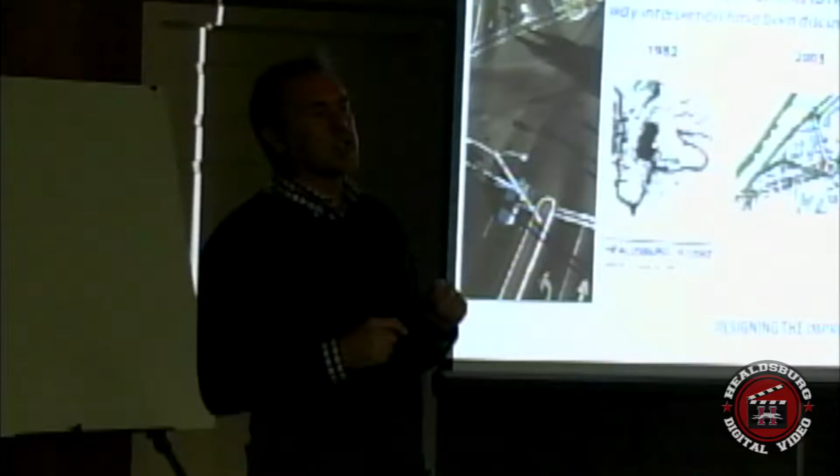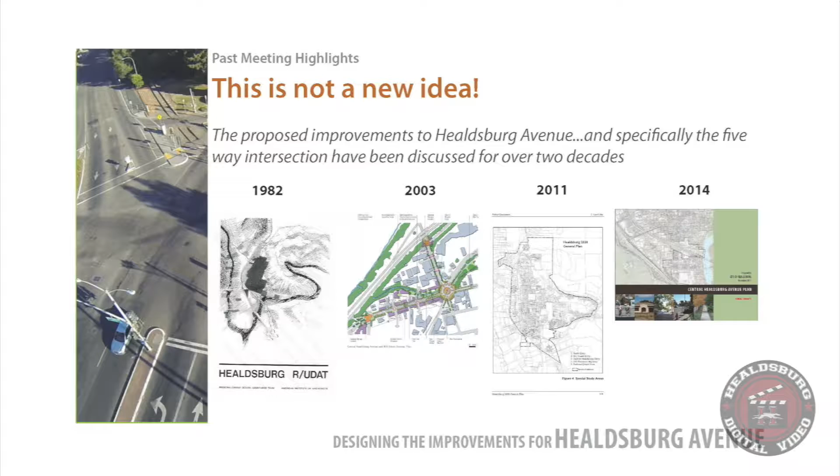So the primary emphasis is that the five-way intersection has a number of pedestrian safety and vehicular safety issues that need to be resolved. There's obviously a train coming through there, and that creates some other safety things that have to be resolved. But there's also, with the approval of the Central Healdsburg Avenue plan, the potential long-term relocation of Nu Forest, development will be coming.

So this is all about improving how utilities and traffic and pedestrians will function within this corridor, not to mention the quality of the experience when you drive into town. Second thing is, this is not a single project. I know there were some comments made at some of the other meetings, boy, this is a lot of money for a roundabout. This is much more than the roundabout. The roundabout is resolving the five-way intersection.

There are actually 5 components to this. The major component, or one of the big components, is actually improving Healdsburg Avenue from Exchange Street all the way up to the five-way. What it looks like dealing with improving pedestrian movement, sidewalks, etc.

Reconstruction of the Foss Creek culvert, which you don't really see, but there's some serious water flow and structural issues in that culvert, and that needs to be rebuilt. There's an upgrading of and repair and expansion of utilities to accommodate future development within that zone. So really, the city is investing in that area in order to allow development to begin to occur in an area that they've targeted as a priority development area.

And then the last one that everybody seems very excited about is just putting all of the overhead lines in that area underground. Cable, phone, power, and actually getting it underground so that corridor is much more appealing visually, as well as it will improve some of the capacity of it. So that was for the first meeting.

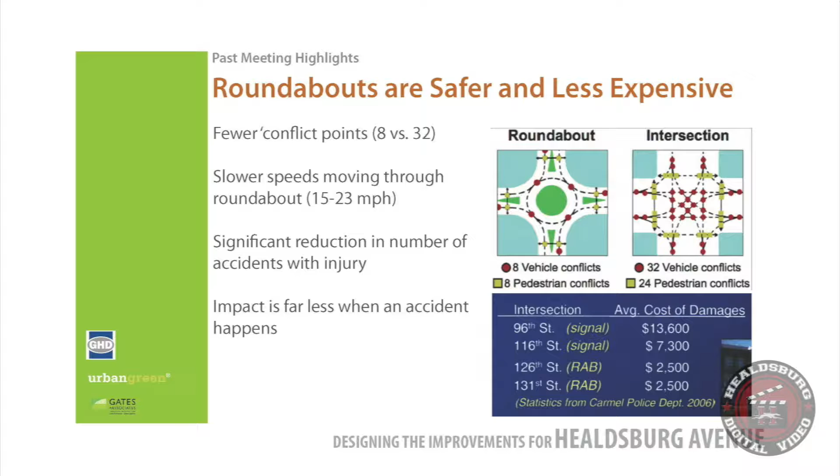This is a chart that Carmel put together showing that in a four-way intersection, the average accident causes about $10,000 worth of damage to somebody's car. In a roundabout, it's about $2,500. So there's a much lower level of expense and impact because of the way they're designed and the speed at which people are driving.

The other thing a lot of people have asked about is how pedestrians and bicycles get through a roundabout, because it does seem a little counterintuitive. It's not just crossing at the crosswalk.

First of all, the sight lines in a roundabout are directed at the pedestrians, so you're not looking out to your left or right peripherally, you're looking dead on at them. So there's actually better safety for the pedestrian.

The pedestrian is only crossing one lane at a time. You can see in this image, there's one lane, they go to the center island, and then they go to the next lane. So they're only crossing one at a time, which gives much better safety.

Pedestrians have priority. Cars actually have to yield to the pedestrians.

Cyclists, as they come into this—and one of the things we'll be working through in the design is where the cyclists go—actually have the opportunity to just go into the flow of traffic. Because of the fewer conflict points I talked about earlier, it actually works better for bicyclists, and the fact that people are driving slower makes it easier for them to react quicker and also to yield to pedestrians.

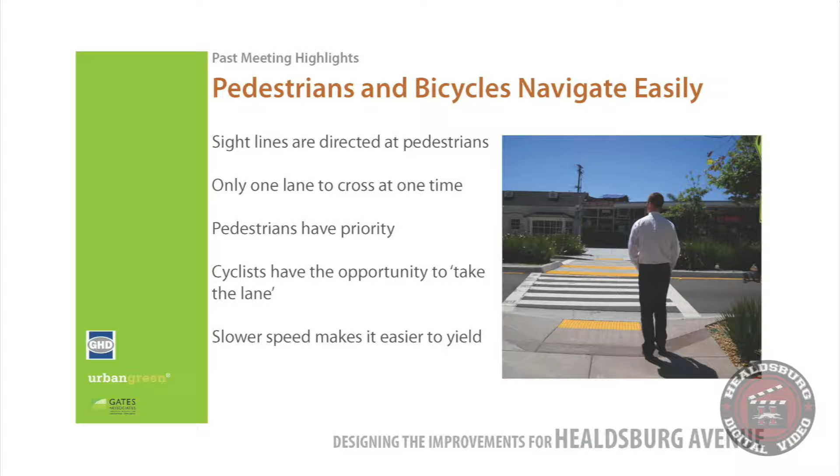The other question a lot of people have had is, can roundabouts, especially a single lane roundabout, handle big trucks?

Roundabouts are designed to accommodate all vehicles, big and small. There is a narrow lane that provides a visual traffic calming effect for people as they're driving in, because the pavement looks narrower.

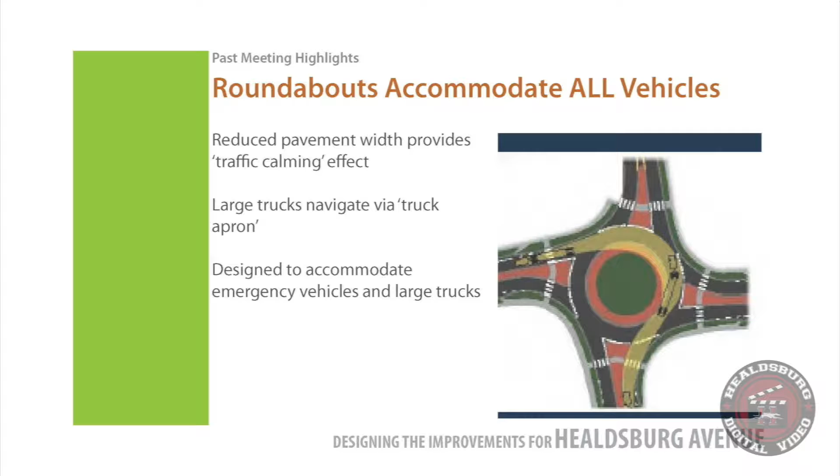But there's this so-called truck apron, the red zone you see in the center, that trucks can actually drive up on. So there's plenty of room for trucks to maneuver, be it a fire truck, a truck hauling construction equipment, or a truck hauling grapes. They'll be able to get around this—it's all designed to accommodate that.

Okay, so that's kind of the last two hours of community meetings in five minutes.

I want to jump quickly to the Central Healdsburg Avenue Plan, because, as I said, that's a keystone document for the work that is underway now.

First of all, the CHAP, as we've called it, is a vision plan, not a specific plan. So what that means is it sets out policies, guidelines, and some framework issues—it doesn't define in detail what goes where. The idea is it provides a vision for that area.

This is the area basically from the five-way intersection down to Exchange Street, out to 101, not quite to Front Street—kind of a midpoint in there—but it's really a lot of those industrial lands that are likely to change over time, given what's happening in Healdsburg and the proximity to the freeway.

It was really meant to set the vision for that area before development comes—before a developer shows up with an idea. This was the community coming together; it was a very active community process that set together a vision of what they wanted to happen.

So there's vision, principles—it really is based on a street type framework. What is the character of the streets in that area that defines not land use, but the pedestrian and vehicular experience in those areas? And then it provides some design guidance for how the buildings around that inform it.

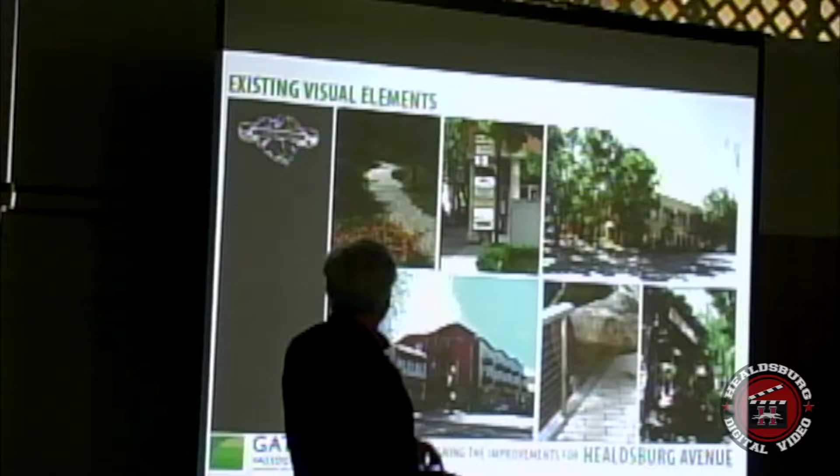Next image. So these are just pieces, whether it's a native plant garden along the edge of the creek, or that's a bench, I think, at Shed, which is kind of fun. So you've got a real range of things - that's that big log that broke through. You've got new architecture, you've got old architecture, you've got a lot of trees.

Next image. So looking more at the street we're dealing with, we're going to be connecting to something that's already there. There's already been talk about the more formal part - this is the more casual part that we're going to be building. So this is what we're going to connect to, this is what you have now.

Signage - you've got Shed on the lower right, very unique architecture. It's kind of fun, but very different from a lot of historic architecture. You've got a lot of things going on. We need to cut through those things, take them apart, and put them back together on our piece of street.

Next image. So let's talk about what we're dealing with. We've got a river, we've got a beautiful community, we've got a town plaza. We're fortunate that 101 did not slice this town in half like so many Caltrans corridors did.

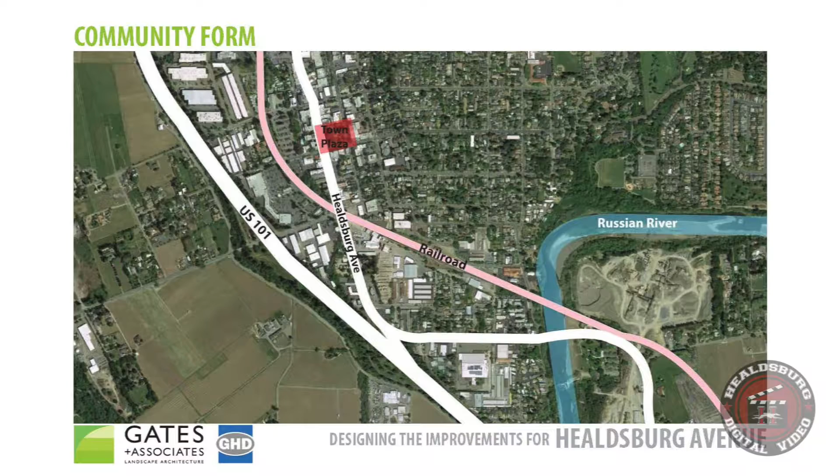It left it very much intact. You've got a railroad cutting right through downtown, of all things. Of course, that's kind of what makes it special. And then, of course, the river and all the agriculture that goes with it.

Next image. So this is what we're dealing with tonight. It's a piece of street. It has a Foss Creek corridor going through it. It has a rail line slicing through it. As you come off the freeway, you've got a first impression—you arrive at a gas station and a McDonald's parking lot.

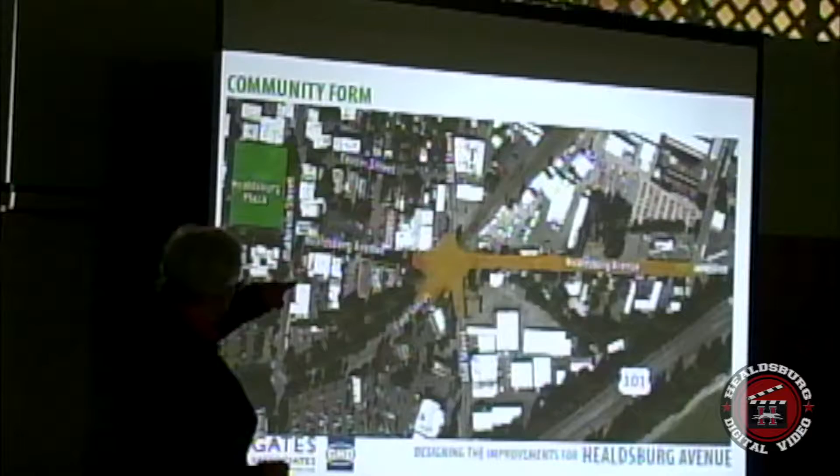You know, we can change that. It's basically 4 lanes of road through that entire strip coming into what will become the roundabout, which will be here, and very little parking on that. It's rather wide—there's a shared lane in the middle that you can make turns off of. It's a lot of asphalt, probably not nearly as scenic as the upper part.

Next image. So what we're trying to do is break this into bite-sized, digestible pieces. You don't have to listen to this, but when we give you a base map to make your collage on, it'll have this information on it, but I'm going to walk you through it.

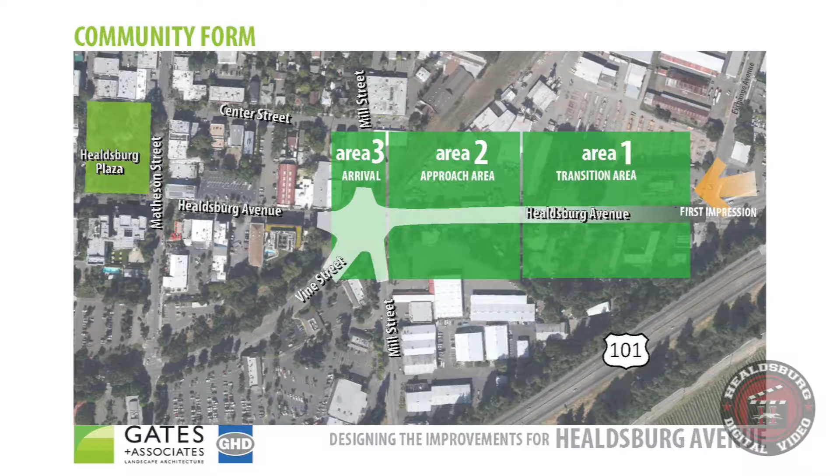So you know how we're perceiving it. So in dealing with the street, we think something special should happen here. At that point, you're out of Caltrans' way, you're coming into this place—it's what we're calling the first impression. Here's the McDonald's with the parking lot, and then you're pretty familiar with the other facilities.

This is what Jim was talking about. This is going to change. We need to create this vision so when the private sector comes in and has a great idea, it's going to be in sync with the vision that this community has.

So we have Area 1, and we're calling that transition. The diagram we're working with tonight has Area 1 basically as 4 lanes of traffic with some median shared, and it's going to transition from 4 to 2. When the right-of-way goes to 2 lanes, that allows for more medians, more planting area, and some parking on the side—so it's a different feel, a different travel pattern.

And then Area 3, we're coming to something, and that'll be the roundabout. It's going to be highly visible—a very important thing that you've come to, that really sets the tone for this community probably more than anything else we've got. It precedes the plaza, and as Jim mentioned, we don't want to cannibalize the magic that is the square, the retail center—we want to build into it.

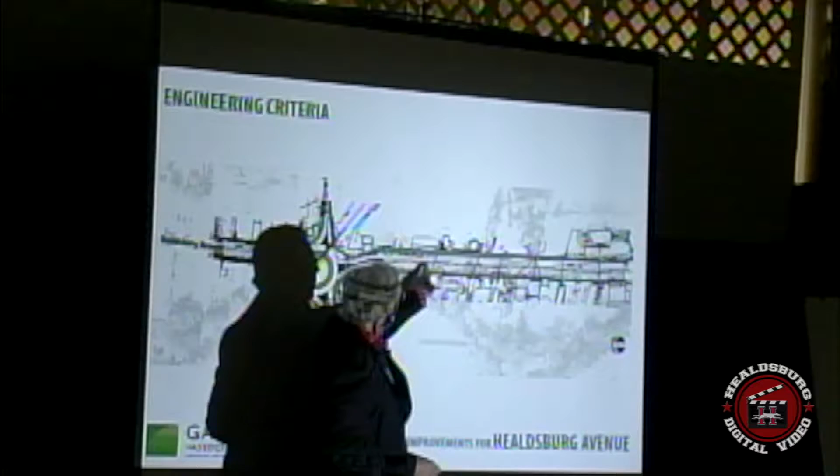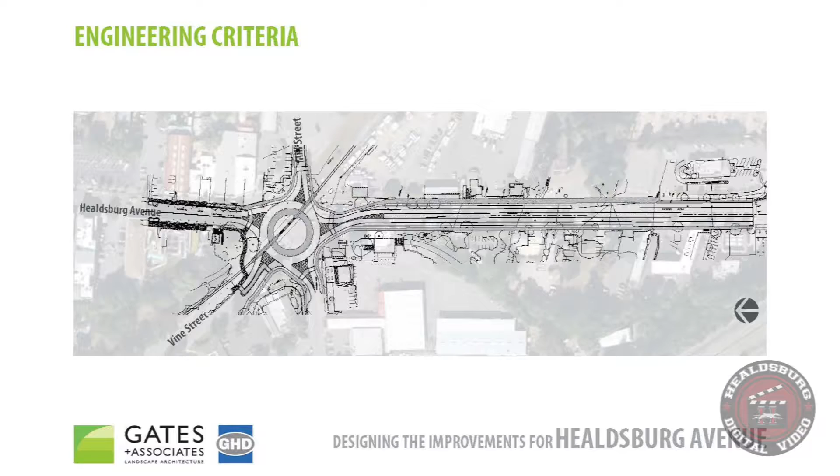Here you see it—this is the roundabout, this is the rail line. You're seeing a new center travel lane, you're seeing sidewalks, you're seeing the 4 lanes there transitioning to 2. You're seeing the pieces, and I'm going to explain—we're going to treat these diagrams as something we're designing with and around. Those are going to inform the imagery we can create.

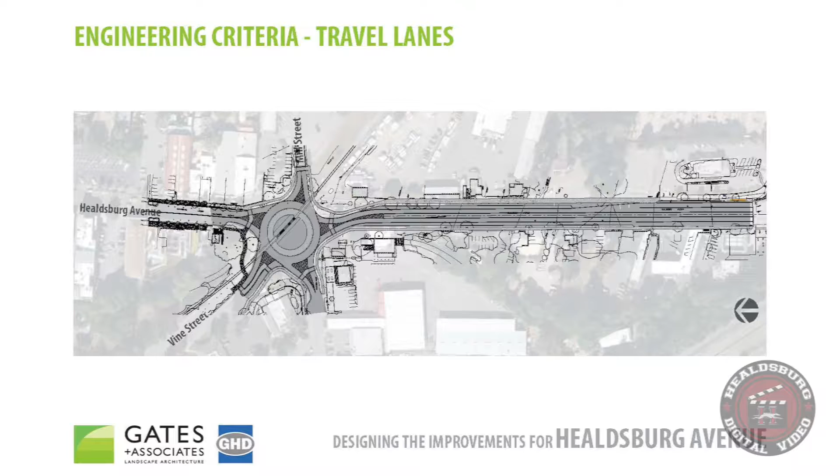So the next image, I'm just going to fly in pieces of it. So these are the travel lanes—it's a little hard to see, but basically 2-lane, 2-lane, middle zone, narrowing into 2 lanes. So 4 to 2, then you're seeing median areas where there's actually no car at all.

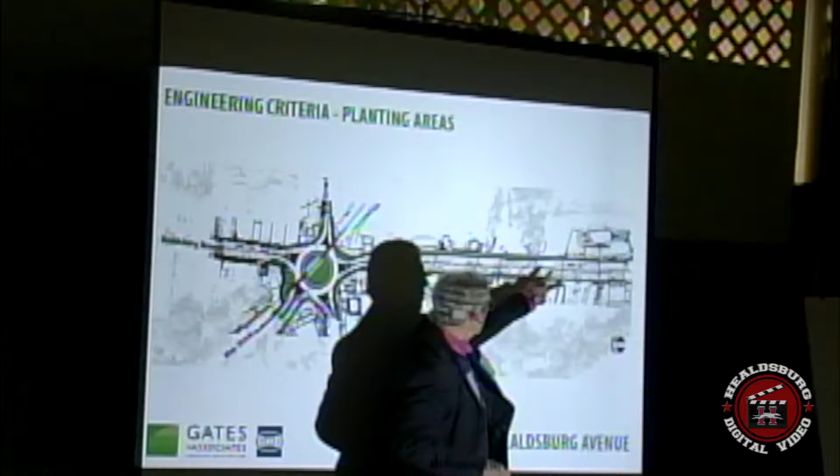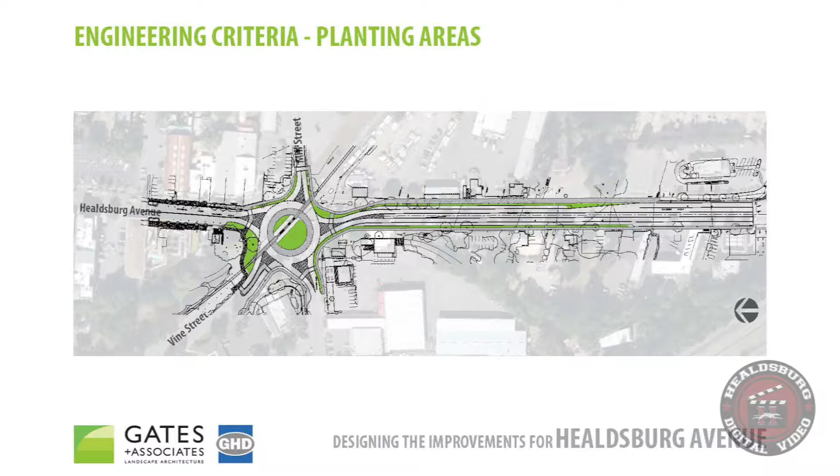Next image. These are the planting areas. So when you create a new curb, we've got a 5-foot strip on either side for street trees and other things, and there's some very generous areas. You can see where we're transitioning from 4 to 2—we get some nice pockets, some very nice corners. The old curb line was way back here. So we're seeing a lot of opportunity to bring in character, green, and other things in those zones. Next one—this is the crosswalks.

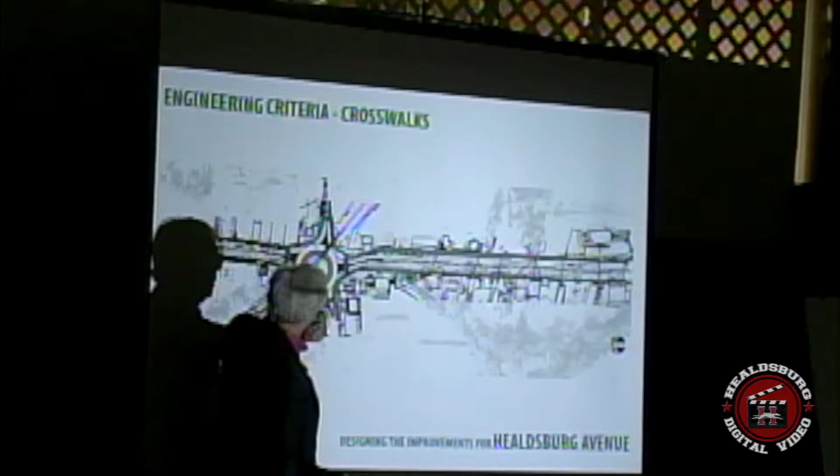A little hard to see, but you're seeing we're going to be getting across the street in these areas, crossing here, crossing there. It's very, very intricate to work with pedestrian and bicycles relative to the roundabout.

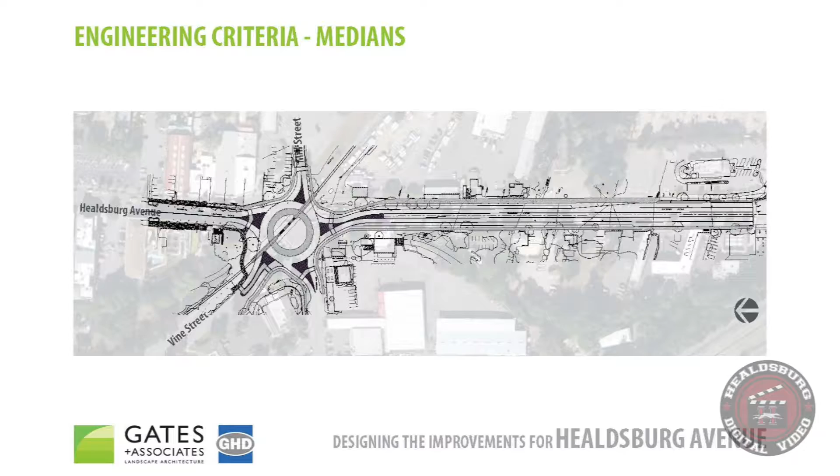Next image. The median itself, these are the dark areas. This whole zone right here, not sure why the color's not jumping on that, but that's a turn lane, and the medians are the green areas we saw before.

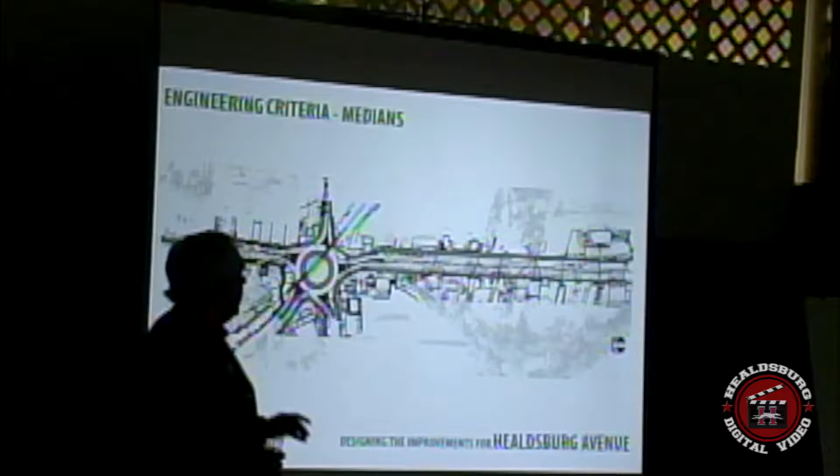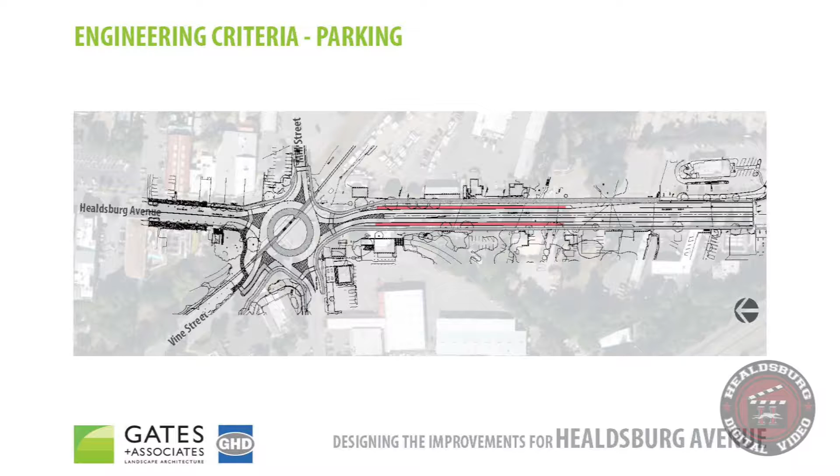Next image, I think, will show you those are the parking areas. So that strip, that's zone number 2, remember, has those places to park along the street.

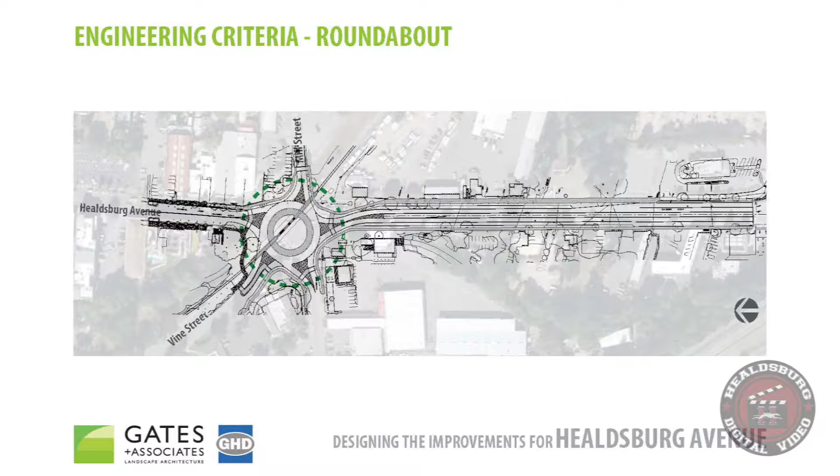Next image. The roundabout itself, which we'll see a little bit more in a minute. It's big, it's got a lot of reality to it.

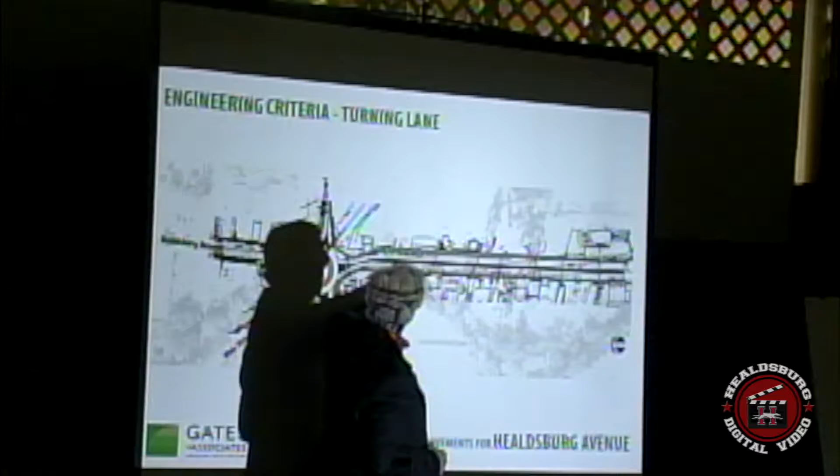Next one. The turning lane, which is this mid-zone, the 2 travel lanes on either side. It allows you to get in the middle and make turns in either direction. It doesn't have to be all turning lane. There might be some greenery in there in certain places. We'll find out, but that's a key part.

Then the walkways, you're seeing sidewalks on 2 sides, a 12-footer on the east, an 8-foot wide sidewalk on the west, the lower side. Next image.

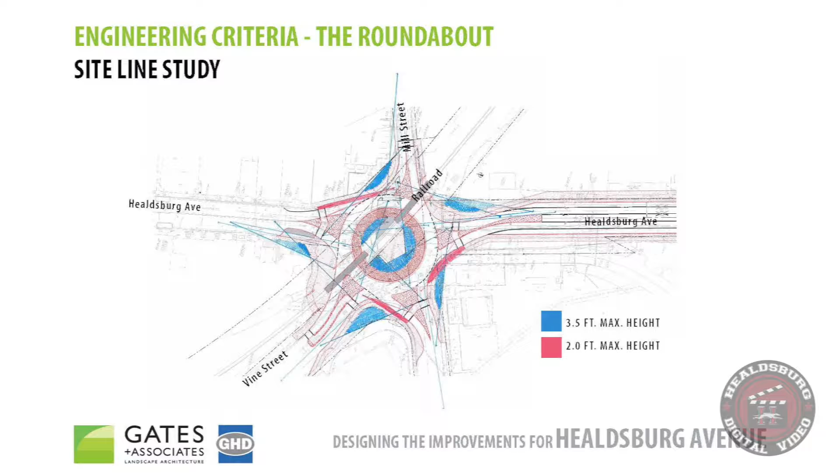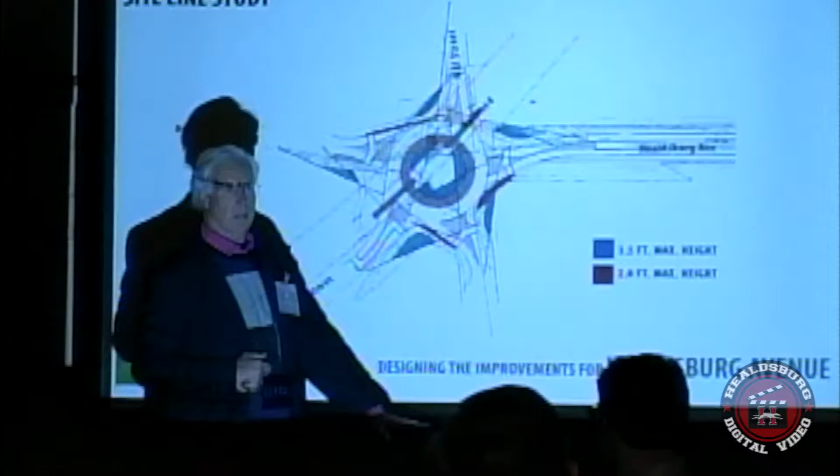This is a roundabout. I won't get into too much detail, but for our point of view, anything in red has to be lower than 2 feet high, and we're thinking sculptural elements, low walls, signage, and other elements. And then anything in the blue, 3.5 feet.

So you can see a lot of site realities, a lot of character that's set by the safety factor of seeing a train, seeing a pedestrian, seeing cars as it moves around. And Jim went into nice detail on all the benefits of that. This is the diagram we have to work with.

Next image. So now what we're going to do is try to take the street, and we have a list on the wall, and it'll be part of your workbook. But basically, we're going to take a street and break it into a series of zones: a drivable zone, a plantable zone, a walkable zone. And within those zones, you've got signage, light fixtures, columns, awnings, bollards, you name it, fruit stands.

And so on the side walls here, we're not going to expect you to memorize all that. So we've got the list there, and we've got the instructions, and it'll be all part of what you need. But I'm going to walk you through some of the pieces just so you know how we expect you to use this workbook. We're going to show you images and explain what the zone is.

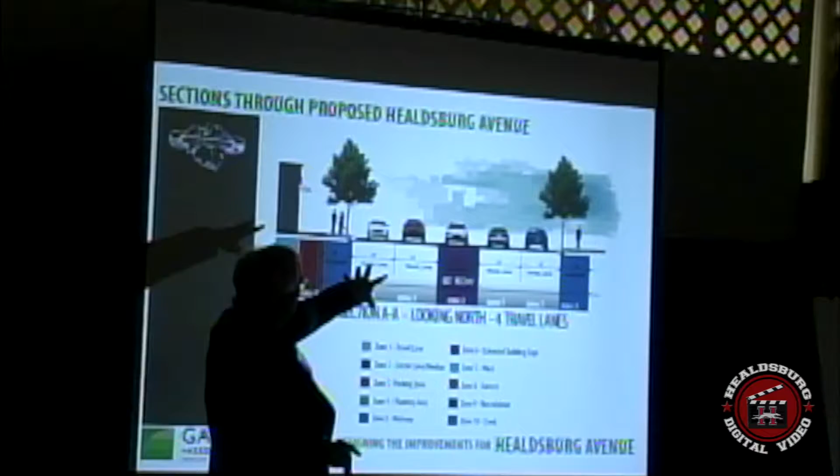So next image. So what we've done, this is a cross section. This is down to the south end where you have 4 travel lanes. So all those things I just talked about show up.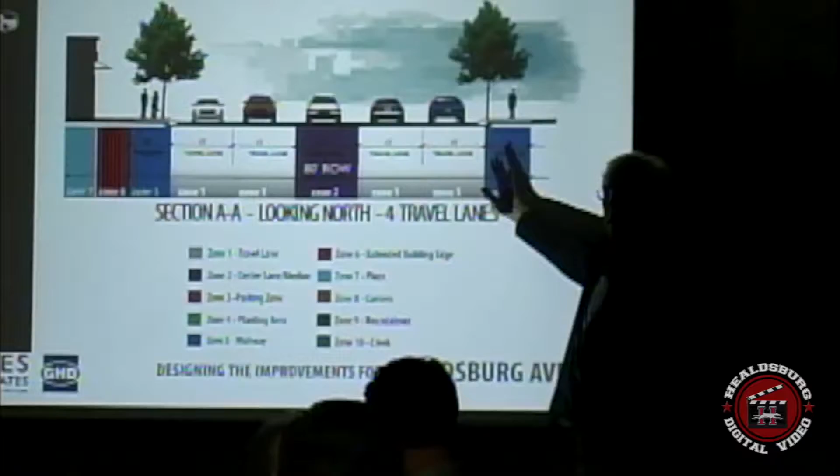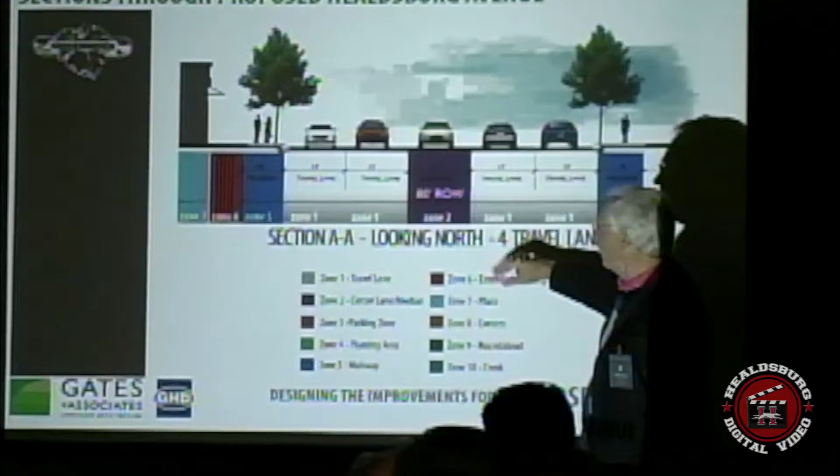So this is the walkable zone, so-called sidewalk. No parking, so you go right to a travel lane, then you've got that middle zone, that transition zone, 12 feet. It's going to be mostly striped. It's a turn lane, travel lane, 12-foot walkway.

Zone 6, and all these are color-coded, so I'm going quickly. Zone 6 is what we're calling an extended architectural edge. So it's going to be building entries. It might be little setbacks. It might be column lines. It might be an arcade. It might be an awning.

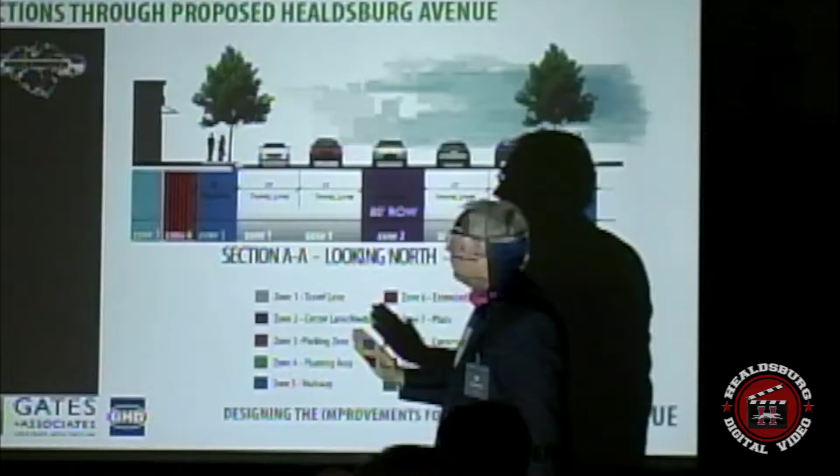So we've given a series of vertical lines. The building could sit out here with the door sitting here. So it's kind of a flex zone where the architecture meets the sidewalk.

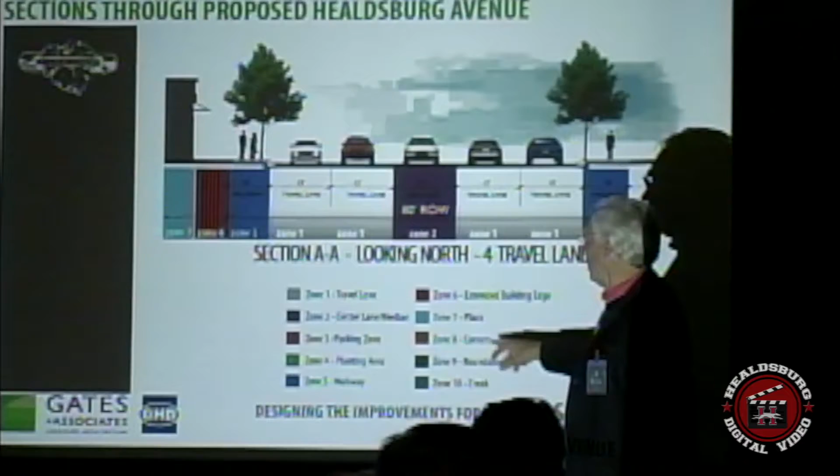And then on this zone, we've got another, which these are all keyed here, which is what we're calling a plaza zone. So somewhere that architecture might recede 20 feet, and you might have a little outdoor eating area or a plaza. And you might also have a paseo, where you make a right turn and you walk. And remember those 5 criteria? Discovery, routes, and sort of having fun with nooks and crannies. That's where those will happen.

So there's one more section now, because this is that first zone transition. This is the next zone. And so you're seeing now we've got architecture on 2 sides. We have 2 travel lanes.

So all of a sudden, we got a lot more fun here with landscape architecture. We've got our building setback zone. So we've got the plaza zone. We've got the corner. Keep in mind, at these corners, we can do exciting things.

So we've got the corner zone. We've got that building edge zone, which flexes. We've got a nice sidewalk, a nice plantable zone. Now we've got some parking on the street, so we have a separation between the parking. Single travel lane, that same 12-foot median and turn lane. Another travel lane, more parking. Another green strip, 5 feet. Another 8-foot sidewalk on the east side. And then we've got that architectural setback zone.

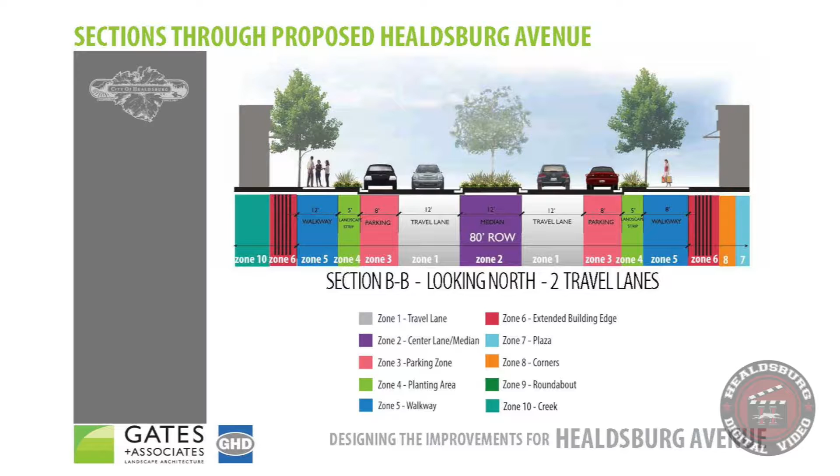And in this particular one, we have the creek zone, because the creek will show up on the west side. And that was a high criteria, was to take the creek, try to bring it back best we can, and make it a usable, visible, important part of the community.

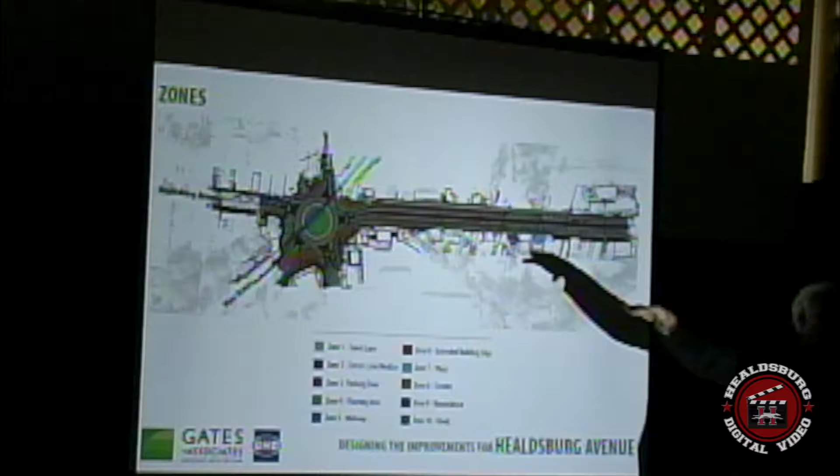So the next image, I'm just going to give you some character sketches. Here they all are together. This is the base map you're going to have. You're going to have a 5-foot long drawing, and it's going to have this on top of it. And we're going to ask you to create cutouts and images that show us what you think happens in these areas, sort of a free form. So what do you want to do with this plantable area? What do you want to do with the possible building edge over in that area? That we're going to let you tell us.

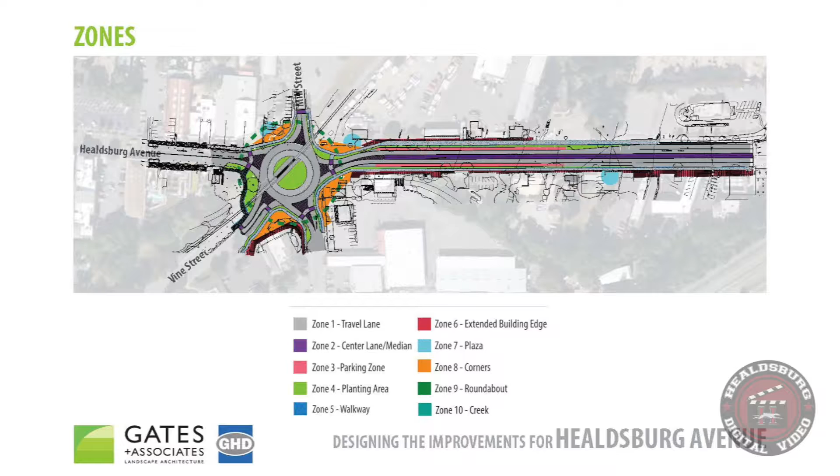So next image then, I'm going to go through each zone and just give you travel lanes. Pretty obvious, right? You know, we might be able to do something with the asphalt. Maybe there's a chip seal or something, but travel lanes tend to be travel lanes.

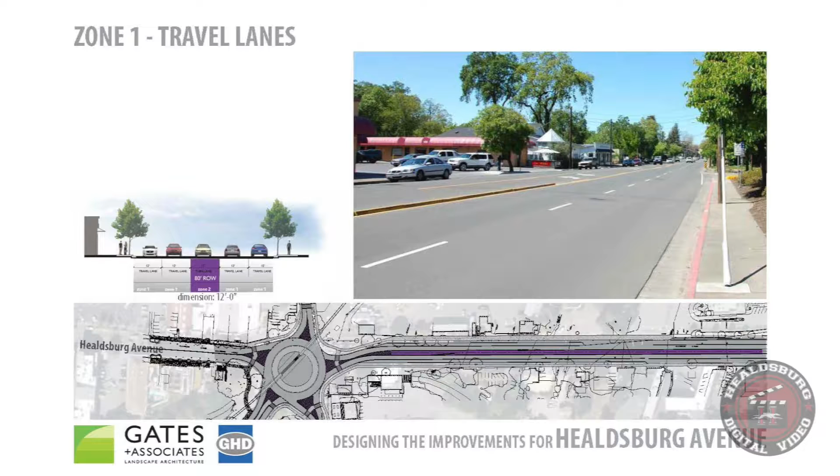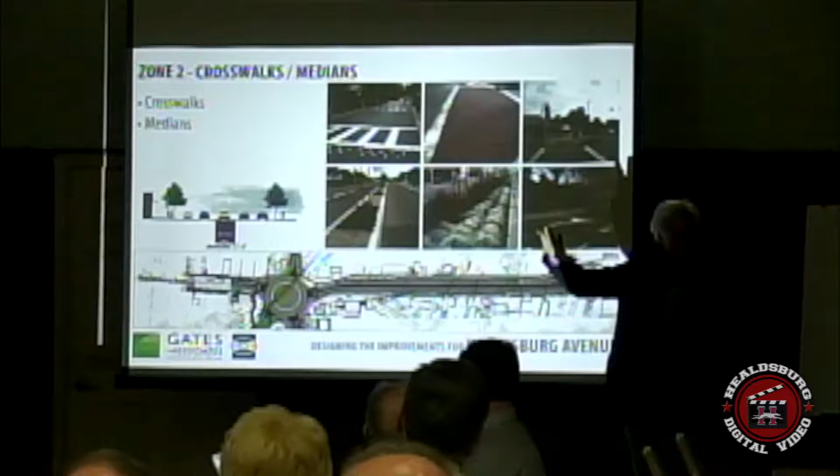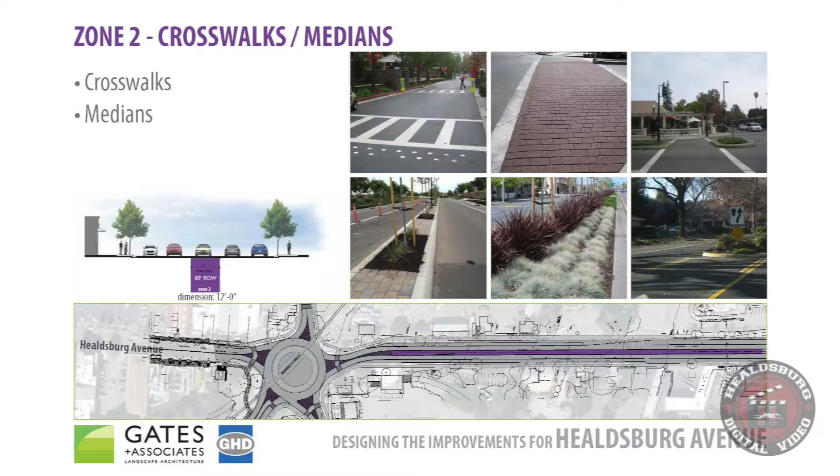Next image, zone 2, crosswalks and medians. What do you want to do there? You can put concrete, you can put colored pavers, you can put cobbles. There are a range of things you can do. Our booklet probably has 20 or 30 images of what you could do there. And if there's not an image there that captures your fancy, then draw on there and say, I saw an image in Santa Fe, New Mexico, or wherever it was. Tell us what it was. This is your chance to sort of educate us. So these are just images, there are many more in the booklet.

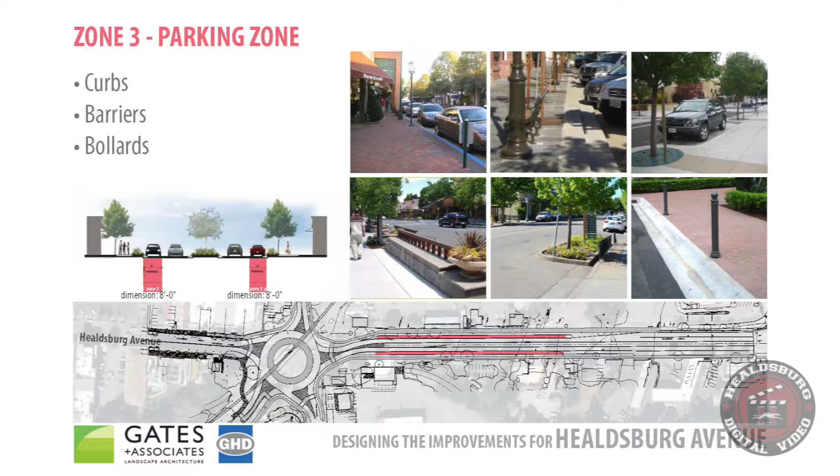Next one, the parking zone. And you can think about the parking zone. It could be striped, it could be paved, it could have a different color to it. It doesn't have to be gray asphalt. So what are the edges? What are the curbs? We worked on a project in Livermore that has 2 3-inch curbs, and it's easier for handicap, and it doesn't look like suburbia. There are things you can do. What are the images that work for you? The signage, the bollards, the barriers. We want to create probably some degree of separation so the cars aren't necessarily right on the sidewalk. If you look at what's out now, you have planting zones, bollard zones, some of the regional water quality that you've just done on some of your streets will be happening on this street. So images that can happen on the parking zone.

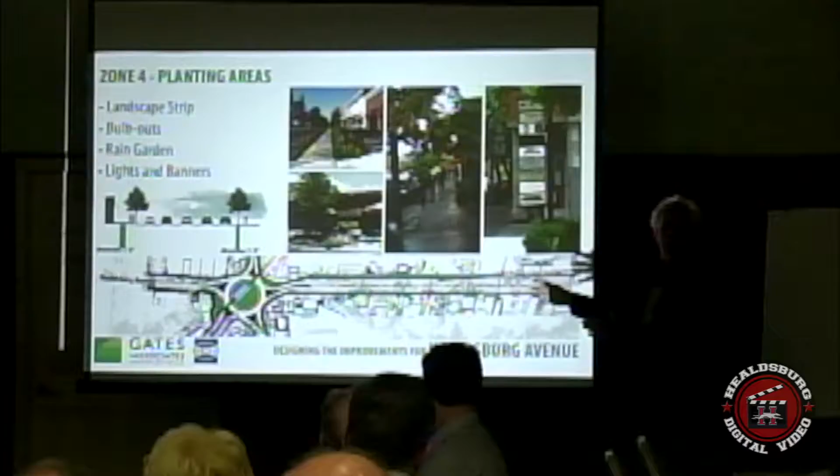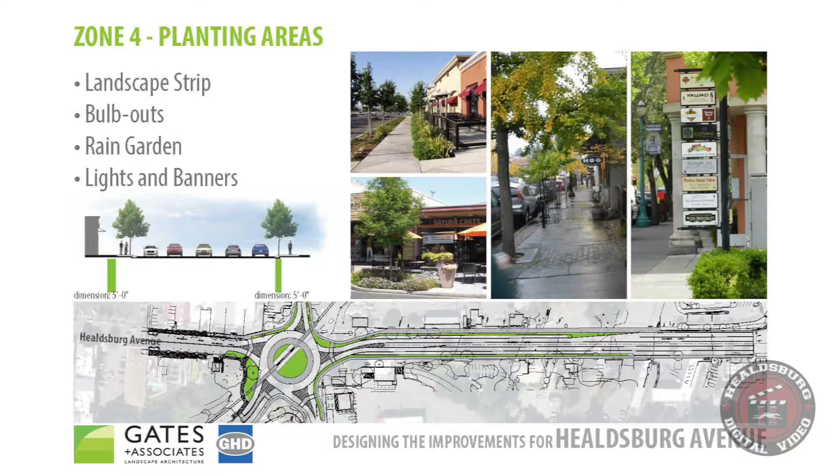Next one, the planting areas, that's pretty obvious. As you move forward to the north, it's all ginkgo trees, fantastic yellow color going on right now. It's very cool. You can extend those. Maybe you put something different around the roundabout. Maybe you bring the ginkgos to a certain point in zone 1 and do something different where you've got 4 lanes, maybe it has a different character. Maybe if the creek comes about, maybe you put riparian or native plants on the street near the creek. Tell us what you're thinking. These are just examples to show what's there now, different materials, all sorts of things. So we've given you lists of elements and then images for them.

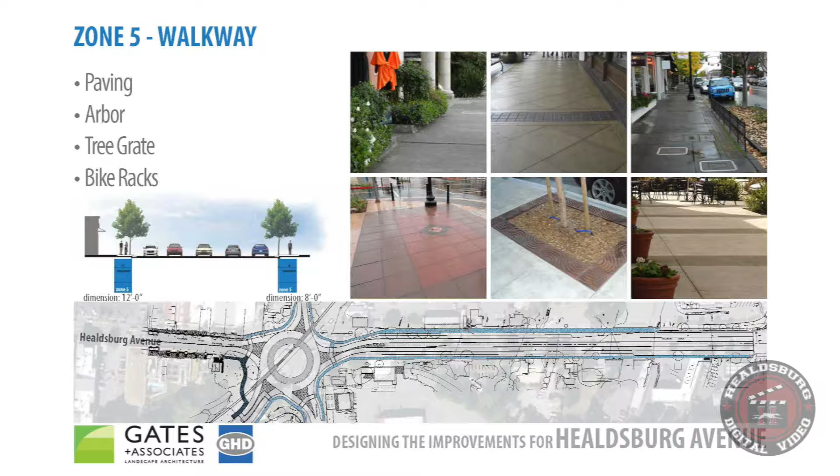Next one, the walkway itself, it can be concrete, it can be a myriad of things. You have particular tree grates and particular elements now. You can keep those, you can do a mix. What's in your mind? What do you think that sidewalk should be?

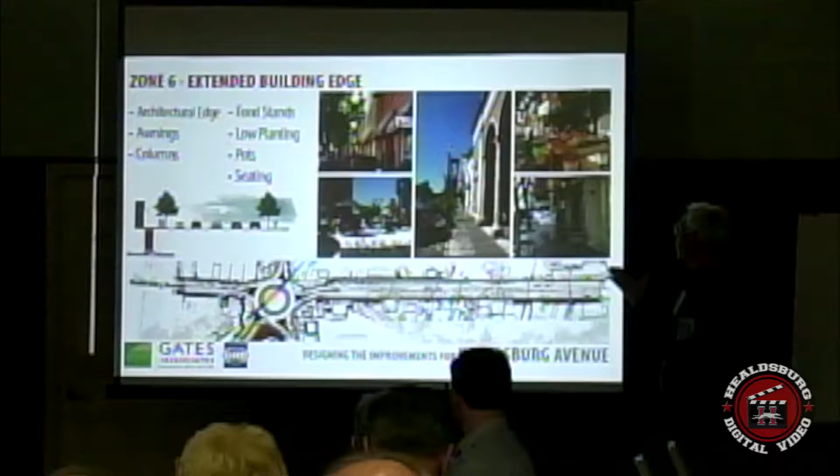Next one, the building edge. Columns, arcades, places for display, whatever it is, something that gives the street life, character. It's a patina, it's an artful feeling. It's got great smells, it's got things you could buy. It's part of sales, it's part of what makes this community, whether it's outdoor eating areas. So again, we've got a list of things. It's the extended building edge. We're not talking architecture, but images we've given you have architecture in them.

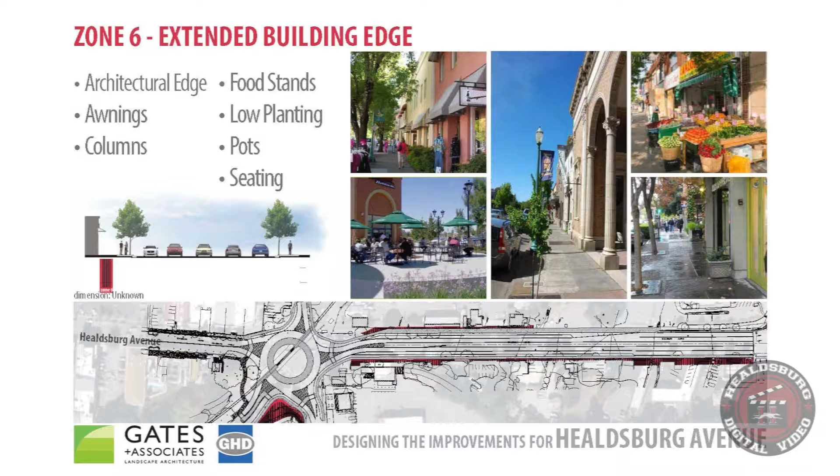We can't pretend like there's not an architectural edge, which is why we're having you build a collage, because it's sort of putting the overall pieces together that we want to hear from you about. So if you say, well, I like this because it's got a lot of trees and they're close together and tall and they make the building not look so strong, that's what we want to know. You might take that image and scratch out the building and say, I like the trees, I hate the building and the building color. You're educating us here. So all of these images are part of that feeling of the street.

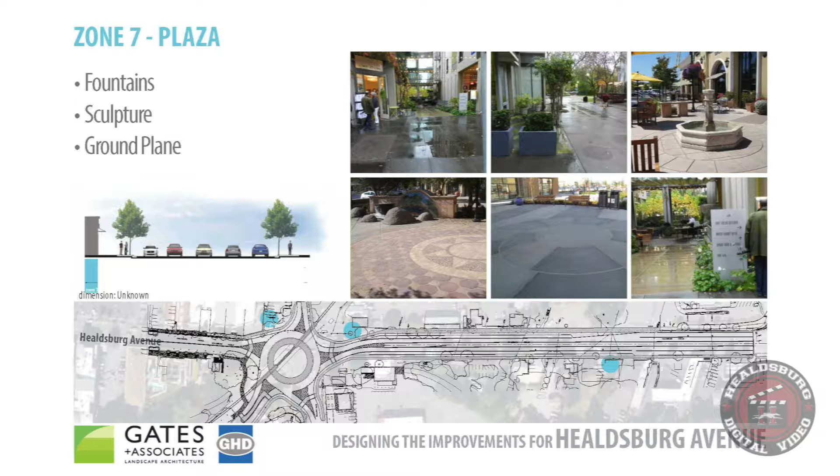Next one, the plaza. We don't know where they'll be, but maybe there are opportunities. The corner is an obvious one. There's some now. Who knows, when the developer comes in, there may be a street here, there may be a plaza on that corner. If the creek happens here, maybe there's a plaza this developer wants to sit next to the creek and have creekside dining. Talk to us about that. What are you thinking there?

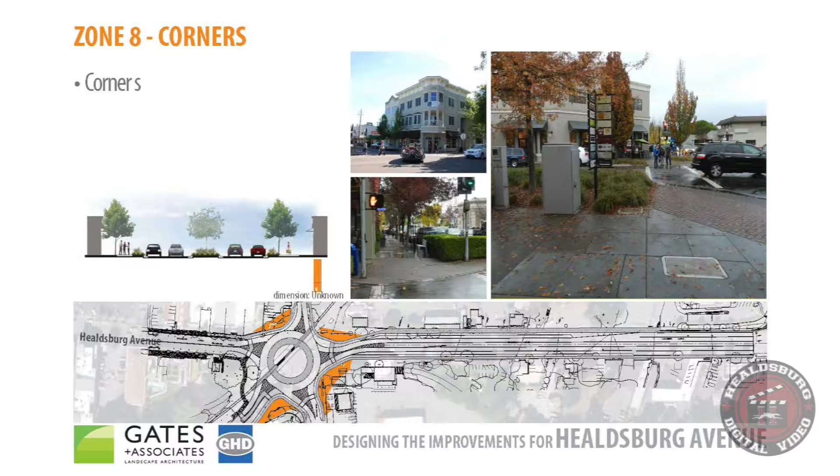Next one, the corners themselves, there may be more. If a street comes in here, there may be a nice corner there and there. Who knows, there may be a widened driveway. So what can a corner be? You guys have just done some nice things with your corners with regional water quality, some nice new planting and paving. It could be more of that, or what's your vision for those? It could be seating areas, it could be a range of things. We've got some very sizable corners that we can have a lot of fun with.

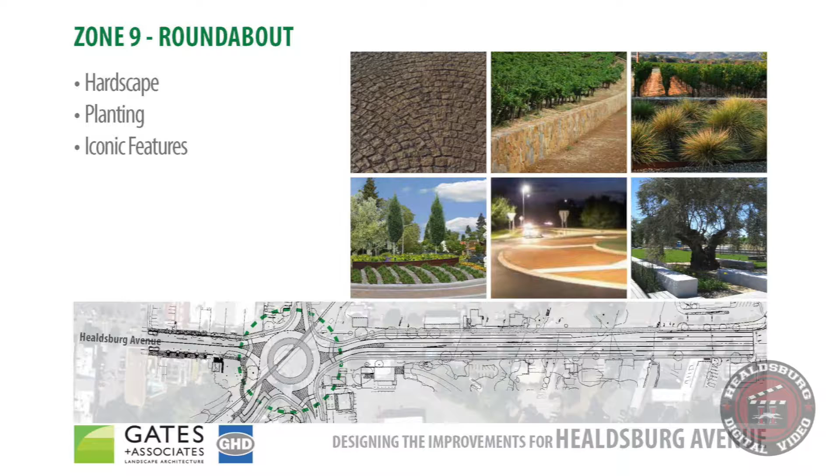Next one, the roundabout itself. As I mentioned, there are a lot of regulatory requirements there, sight distances and heights and things, but again, let's talk about it. What kinds of materials? It's obviously going to have a lot of planting in there because we're not going to have outdoor dining there. So what are the kinds of plant materials? What's indigenous? What's the feeling about that?

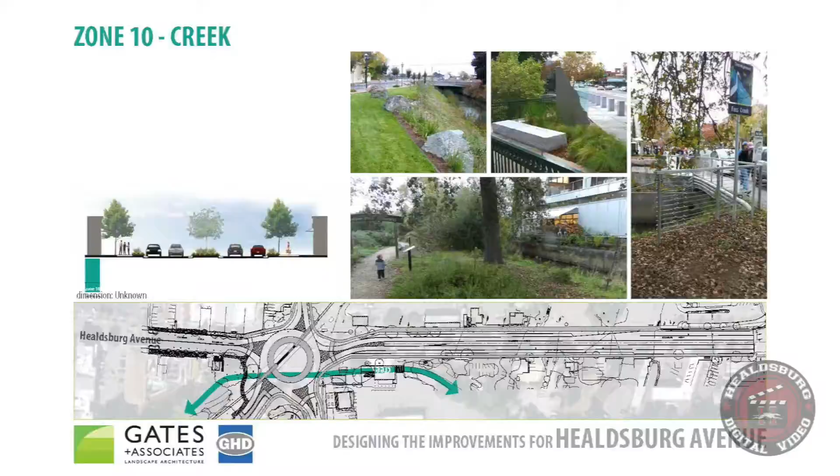Next one, the creek itself. We're not sure exactly what form it might take, but talk to us. Is it natural habitat like the botanical garden and native plant garden off to the north by Shed? Is it a place to sit and eat? What is it? Is it pure habitat and wild plant material? Talk to us about that. And it tracks right here, goes underground here, comes back out here. There are different pieces of it here that might have some great opportunity to bring back, and who knows, maybe in the future, a lot more of it.

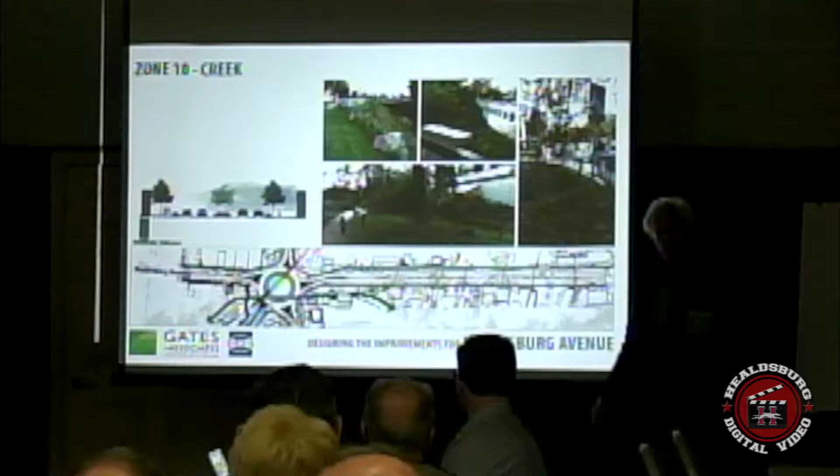Next image. So what we want to do now, and I think we're doing fine time-wise, we want to break you into 6 groups, 6 or 7 people per group. We've got scissors and tape, and we've got everything you need. We're going to take a 5-minute break. We would like all the architects to split up and be on different teams, changing the architecture.

Hi everyone, thank you. So one of the main things we were looking at here, the first thing we came across, and since I'm the first guy, I'm not sure how we're going to be presenting, but I'm going to go through this list here. The travel zones, it was already given to us what we've got.

But the main element we were all in agreement on was having bike lanes. I was really saying that between Windsor and Healdsburg the bike lanes are really wide and on both sides of the road, and tying that in somehow was something we all agreed on. As far as crosswalks and medians, we were all in agreement on staying away from brick and high maintenance things, more of a stamped concrete. We were also in agreement to do lit crosswalk systems. We don't know what the buildings are going to be or where, but having the lit crosswalk systems and maybe stamped concrete versus a brick product or things that could be slippery, that was a thing.

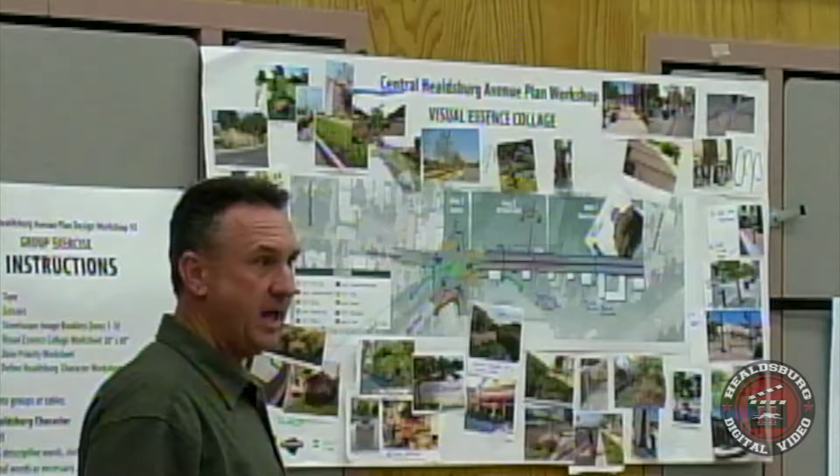The curbs and gutters, the curbs and barriers and bollards, we're in agreement that having little bulb-outs here and there is a good thing, slowing the traffic a little bit, and then providing some planting on one side.

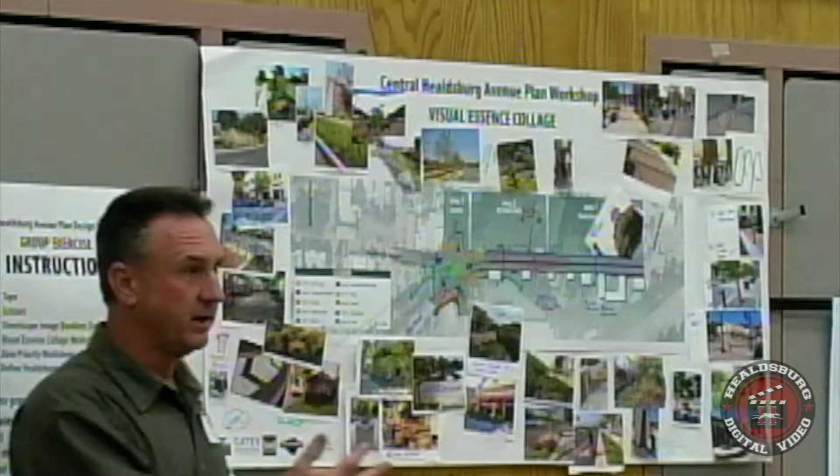On the other side, the creek side, we were all in agreement that having a walled area along one side was a bonus, and then having riparian on the other, with a setback riparian area in the plan that would benefit everyone. So you've got a real visual down there.

The landscape strips, the bulb-outs, the rain gardens, the lights and the banners - I think I've covered that pretty much. Then the walkways.

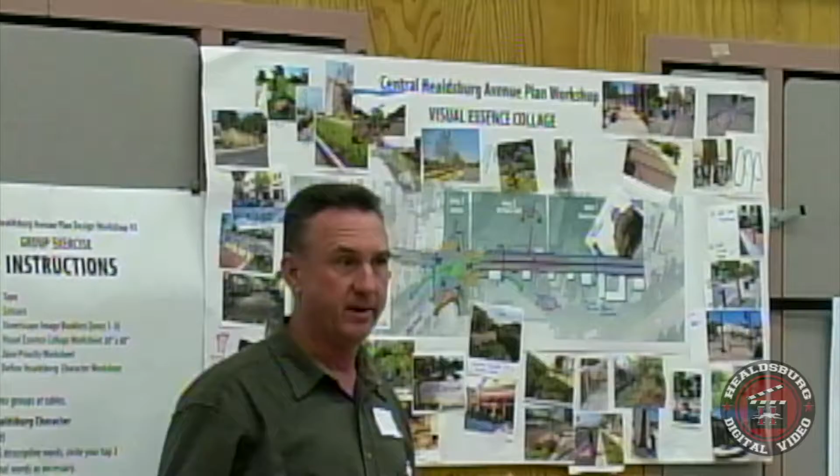The tree grates, we want them embedded in the sidewalk. We don't want trip hazards. We want low maintenance, nothing that's going to be lifting - being very careful what trees we choose in the future so they don't lift sidewalks is very, very high priority.

Again, the bike racks here and there was another element. So we didn't even touch the extended building edge because we don't know what those are going to be - the zoning is going to dictate what type of buildings go where, the size and the height. I was real strong that when you're coming north on Healdsburg Avenue, somewhere you'd have a visual area where you could see Fitch Mountain.

They did add some of the building edge stuff here, Bob. Yeah, okay.

Some of us like the outdoor farmers markets, having some activity out on the sidewalk. We went with having little outdoor dining areas.

We had the wall and then the creek with a riparian area. We didn't like fountains with open water in them, because I used to throw soap suds in fountains, and having dirty water - sculptures with water elements running into a stone area with a recycling system seemed to be the preference.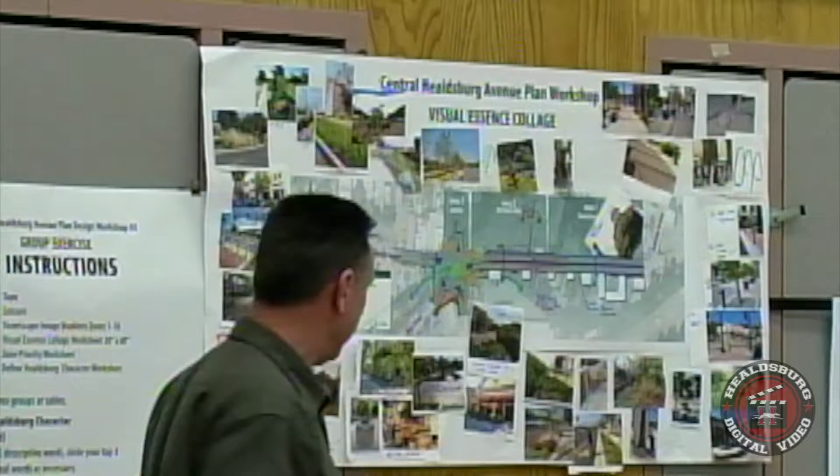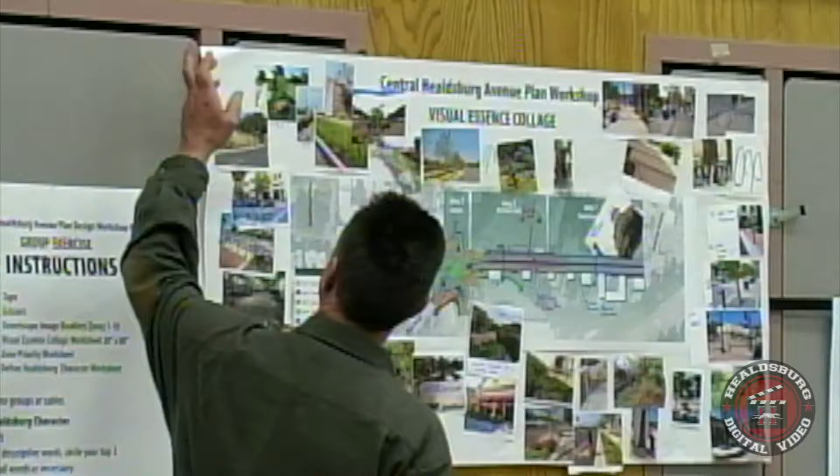As far as the corners, we like the bulb-outs, the hardscapes, and the creek. So going up here, these are the choices that we went with.

Drought-tolerant plants, having some stones, some large boulders in the areas, having trees that would be different colors at different times of year was a real bonus. Having the planting strips down in the median in certain areas, predicated by where the buildings are going to be, was another thing. We do like the architectural elements as far as sculptures here and there.

We like the wide sidewalks. Some of the sidewalks in the plans were just too LA - too much hardscape - so we softened it up with a lot of planting areas, I believe.

These are the types of bike racks that we kind of liked. I think we had a lot of choice. We don't like these kind of bollards, but we do like that curb type.

Having some sculptures and some planting areas was something we were all in agreement on. There were different sculptures - we had many different types, including one with a water element at the bottom. And seating - we like different types of seating, both hard seating and benches that we liked.

Okay, can you jump to your words now and your prioritization? Sure, and we'll jump to team two.

Here, our prioritization was on this sheet. So we went with small town - you can see that we had three different dots.

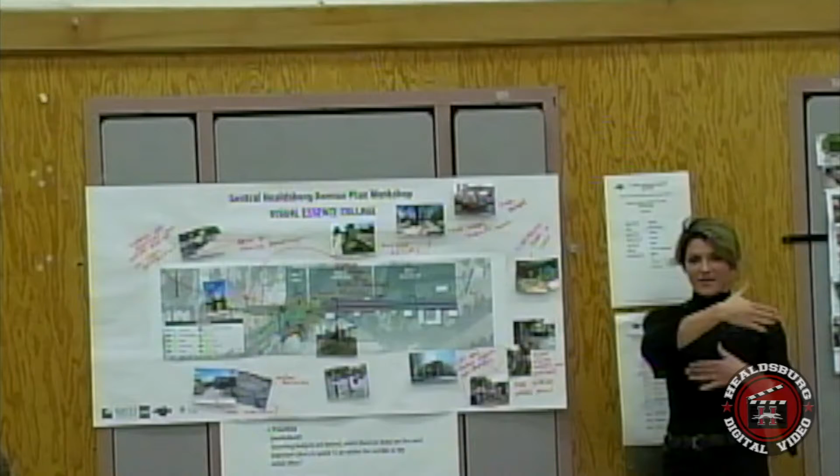We thought that the tall palms would be a good example of a median solution, because there's some issues of, if anybody has pulled into or out of Home Depot's parking lot in Windsor, the medians are filled with low plants and you can't see anything. So I think keeping the canopy up high to provide shading would be nice.

We also like the rockscape. So it doesn't always have to be planting, but it can kind of be more of this sculptural idea, or even art.

I saw a lot of images of parking and wasted space. I think parking is a big issue in Healdsburg that we need to address, and to maximize the amount of real estate and not put trees in between cars.

For the roundabout, I saw this image and thought it would be really nice to have some symbolic, iconic art commissioned to a local artist that remains like a symbol of Healdsburg. I think it should be really non-literal and no words, but really evoke a certain emotion, so that person would really have to understand Healdsburg and hopefully have been here for a long time.

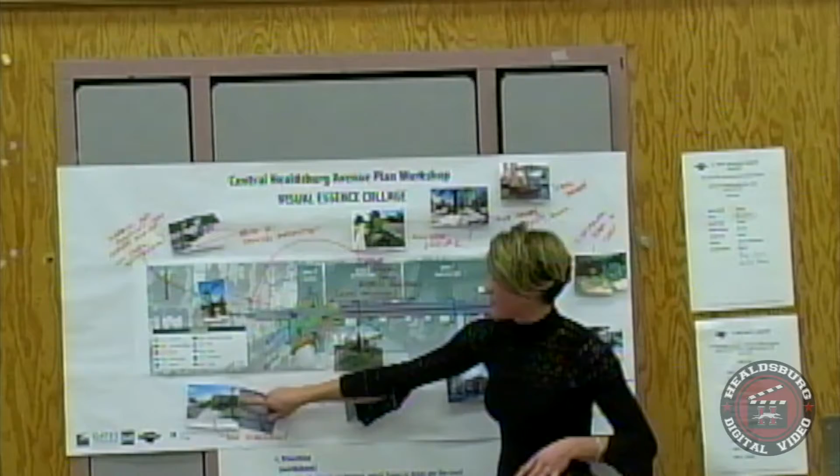In the corners and crosswalks, I think we should avoid any sort of cobblestone or anything that doesn't really exist there already, to keep the historic feel. We're continuing on from something, we're not reinventing the town. So I think this is a good idea here—it shows concrete but also looks like there's some old brick mixed in. The idea of old and new materials reminds you of where we've been and where we're going.

Another one of our focuses is on the creek here, and we really like what Shed has done to allow some walkability along the creek and really highlight that natural feature of the town.

One thing that we didn't put, but I really agreed with, is all of the bicycle emphasis, and I like how you have the idea of taking parking way over here and encouraging people to bike into town. That helps your parking issue without actually having to put more parking in town.

And that's about what we have. So our words were naturalistic, real town—which I think another word for that would be authenticity—and a unified theme. So really capturing this same essence and bringing it into here, so that this transition is very smooth.

For our zone priority, we kind of assumed that there would be enough money for the roundabout, and that's the main thing, it's kind of set in stone. So we picked some areas that might be extra: parking, highlighting the creek, and planting areas.